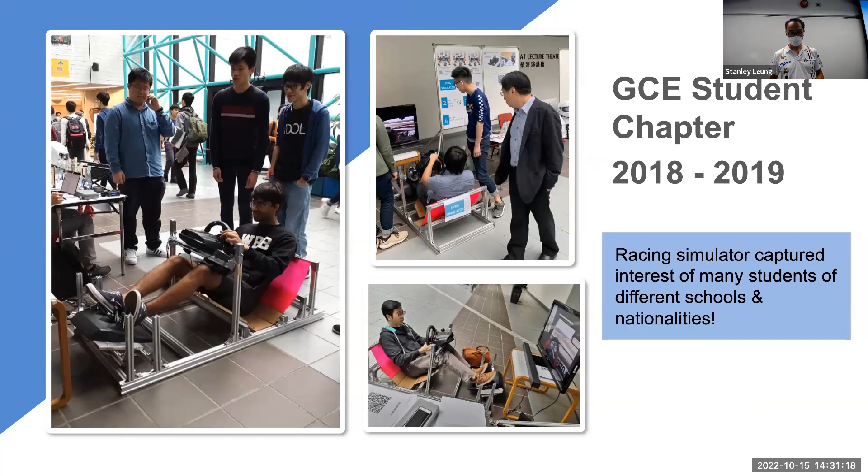Okay, so we also reach out to secondary school students. So why is that? We want to tell them we have this team. We are trying to look for good students in the secondary school to join HKUST and become our team members. Okay. So we also reach out rather than just do the car.

So this is what you say, okay, we developed this car trying to be augmented learning. So learn something real. So we really do the development. We are trying to do peer-to-peer learning. So actually most of the learning is not from me. Most of the learning is from you teaching him, him teaching you. Okay, so you share your experience, share data, share your analysis. This is how the team develops. Because the car is so complicated.

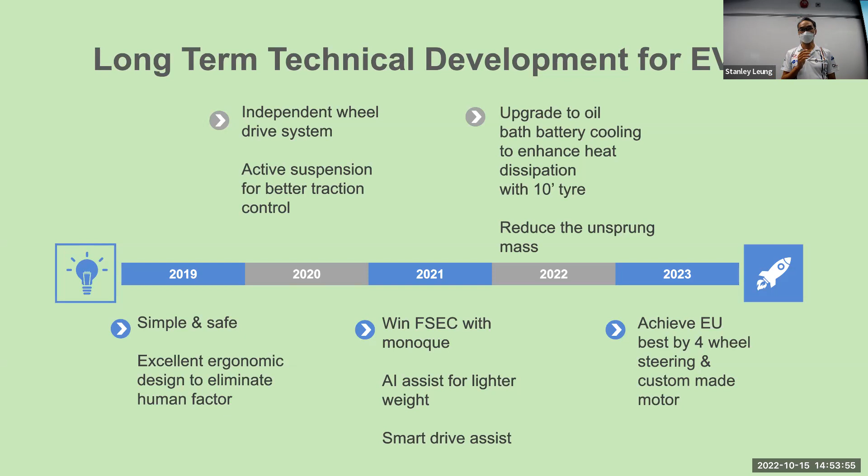Okay, you will say, okay, this 3 years is pandemic, can we get the excuse? The answer is, so it is pandemic, can I ask you to delay your graduation for 3 years? Okay, most students will say no. Okay, that's why you're still here.

So the difficult part is like this. So you may ask, Stanley, you say the thing is so difficult, what kind of technical detail you have done, right? So you say it's so powerful, what is it? So what is your cat? What is your something? Okay, let me show you something.

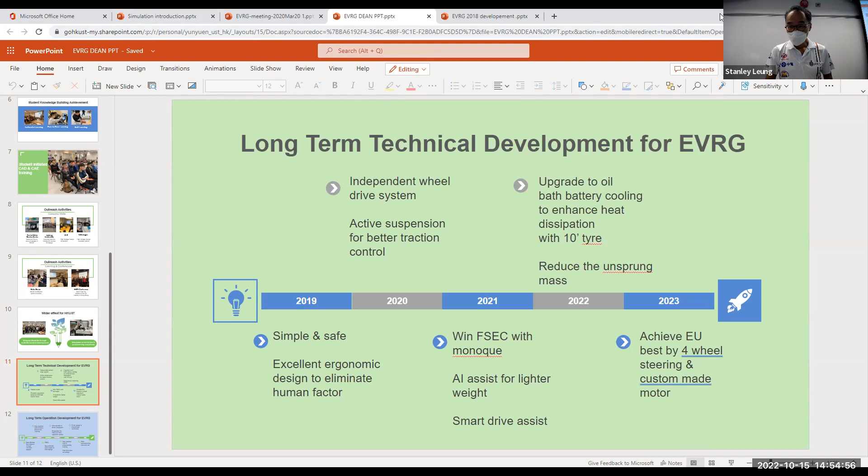Open. Where's my slide? Let me see. One. It's my fault.

By the way, may I know that in the past you guys have joined team or you guys have?

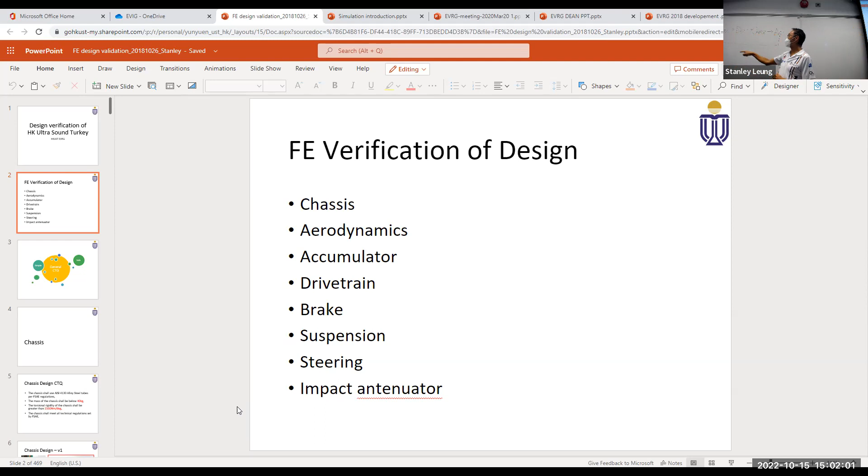Okay, so this is something that we did in the things, based on this PDCA. We always follow this PDCA and we always ask you what is your checkpoint. So if it make, then finish. If it is not make, then we try to change something, fix it, do it again. So very tedious. So we also set a CTQ, Critical to Quality.

So it is like the thing of our car. For example, iPhone 14, our photo is better and better, so they have something. Our thing for our car is simple and safe. This is always true for safe. I don't want you to drive the car and then you get hurt, right? And simple doesn't mean that easy. F equals to MA is powerful, but simple. Simple and safe, this is our CTQ.

Maybe we can discuss about whether we should change our CTQ from this year. But think about it. So we did a lot of chassis, and it turns out, based on my experience, start from chassis, it is not correct.

But at that time, we don't understand. That's why we start from chassis. Why we start from chassis at that time? Because we're thinking about we need some things in the middle so that everything can put it on. But it turns out start from a chassis is not a good idea. I can tell you why later on. Chassis should be later. Chassis should serve us rather than we serve the chassis.

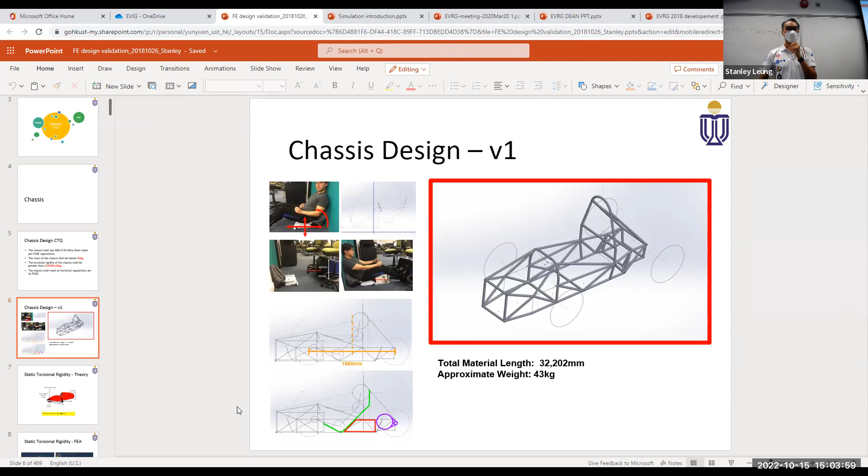Okay, so suspension people understand. So the chassis, first of all, actually, people will think about torsional rigidity. So we did FE on this. For this kind of cage chassis, the high torsional rigidity, it is not difficult.

Why we ask for this? It is because we want to make sure that it is not too soft, and also make sure that we know this number will be fine. So actually, JJ did this thing. In the beginning, he got a very good torsional rigidity design.

Anybody know how much the value he got? You just showed it, I think. You remember in the beginning? So anybody, I mean, you play around with the FSAE for a while, right? What is the value for other teams? Other teams like for space frames at least 1,000, and for monocoques I think that's 5 to 10 times of it. How about the others?

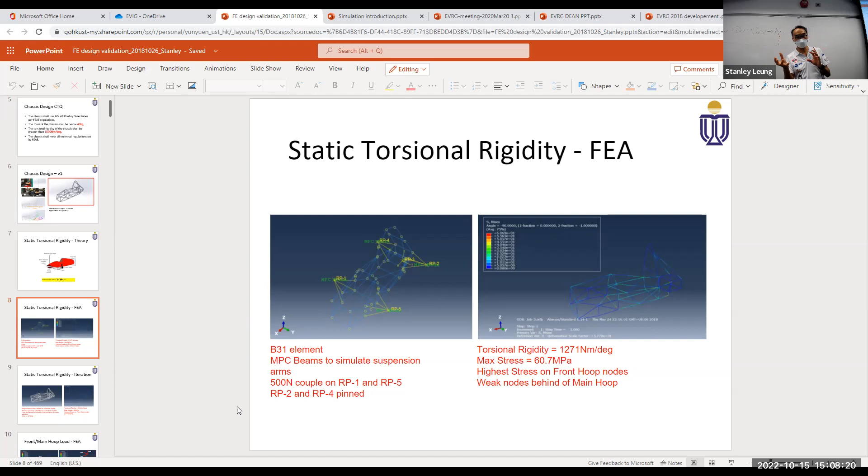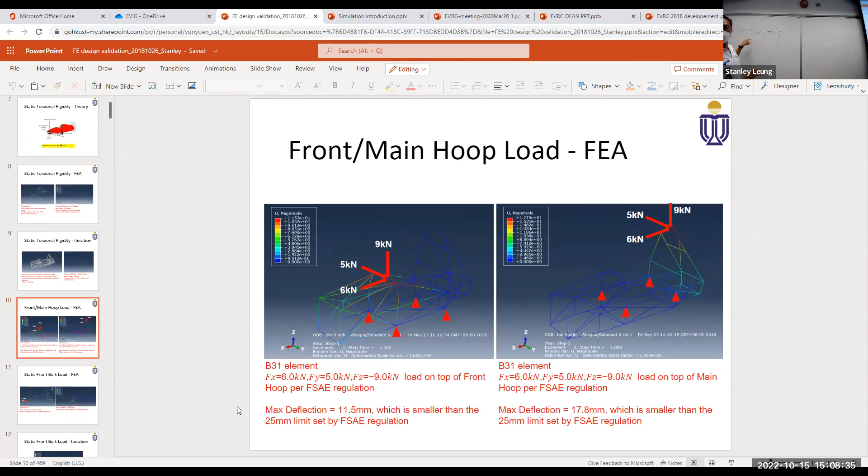So actually, we did reduce the torsional rigidity because we are going to reduce the weight of the cage. So we can reduce some bar so that we lost some torsional rigidity and get it lighter. So a lot of FE for this cycle. So here is the final design, like this.

The final design has one problem here. So this is drive wheel, this bar. We make it too low. Oh, okay. And that's why we always have bad ergonomics. That's why.

So you can be a little bit higher, that's it. Yeah, won't change that much for torsional rigidity, but help a lot for the tension and ergonomics. So this is my only comment at the end. Because at that time, because this bar is so low, we have to choose a small steering wheel. If the wheel is large, then it is over the bar, finish. You can't disqualify, you need to use a small wheel. Small wheel, difficult to turn. That's why every driver says the steering wheel is so heavy, because we need to use the small one so that you don't have a cut off here.

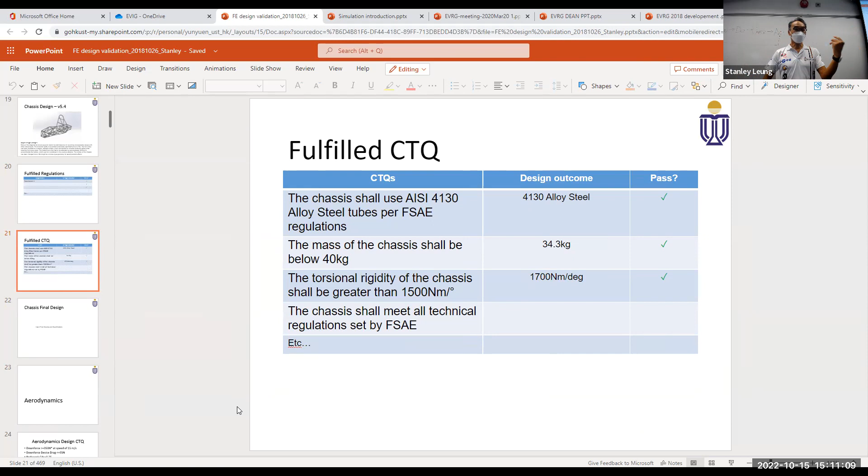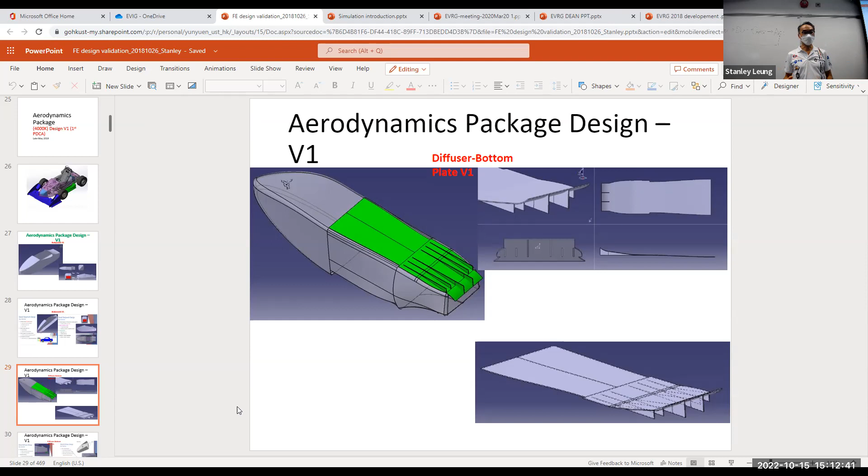So you make the aero kit, there are two goals. One goal is get the downforce. Another goal is try to put stickers so that you get more sponsors. This is very important, right? Your car looks cool, more people want to sponsor you. So aerodynamic kit is important in the sense of sponsorship, more than the downforce, in my point of view, at least at this moment.

So a lot of things we did CFD. We set up a lot of details on how the CFD was done. We assumed the gap here around 0 to 5 cm. We changed this gap to see - not from 0, from 30, not from 30, from 15 to 50 - to see how the downforce changed. Because simulation cannot simulate the sponsor, it can only simulate the downforce.

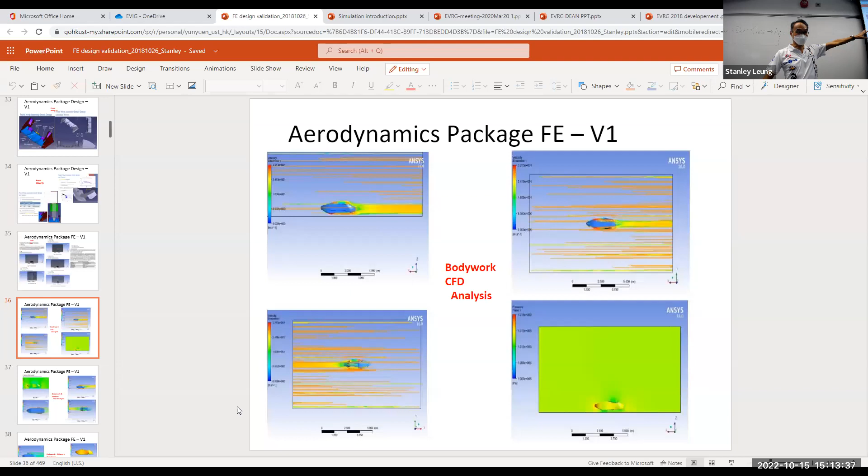Looks cool, and we did verify, asked a lot of questions. I think his simulation is believable. So these are the downforce and drag force results.

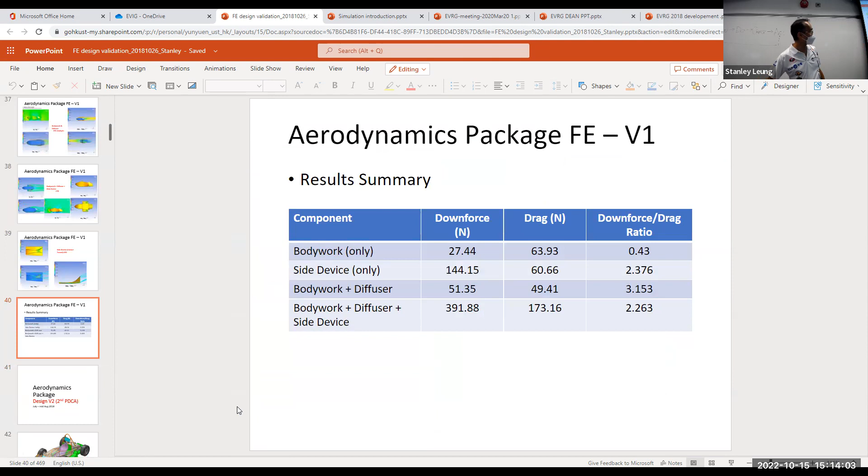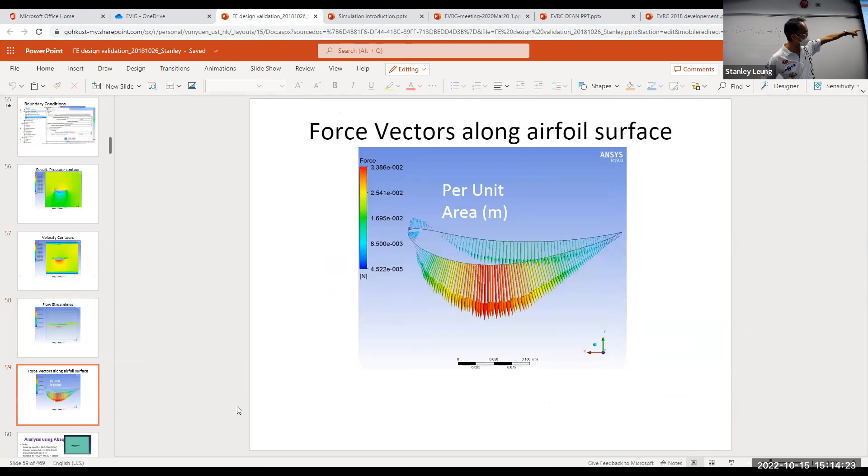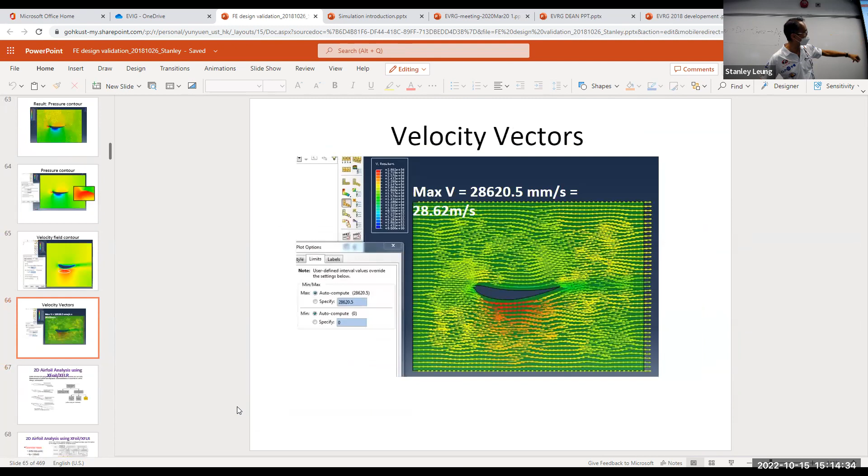Based on this second gen, we again changed the diffuser direction, changed the wing shape, changed the mesh, the force distribution so that it can be evaluated. So the velocity field - because this guy is just an aero student, he knows a lot about these things. So we try to set out the coefficient.

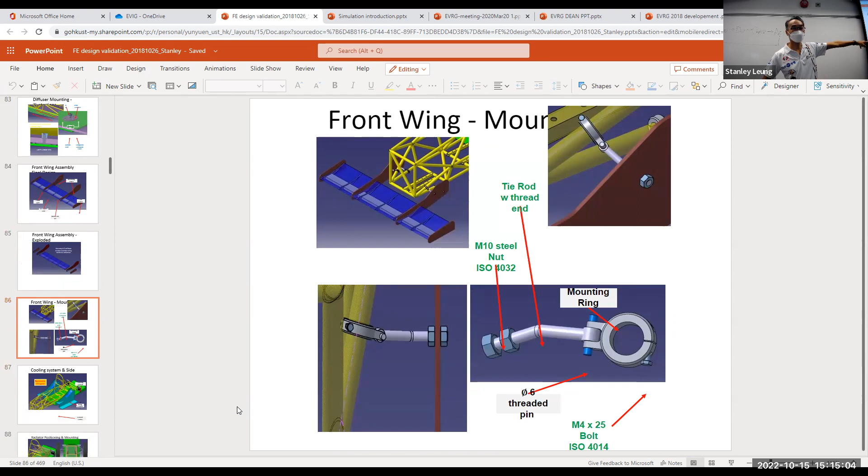Final design - adding how to mount it. The aero kit, the difficult part is we don't know how to mount it.

So for the aero design teammate, if you are not starting from here, you don't need to see me. You overcome this one first. This is the design we have - I still have the CAD. If you have not overcome this one, you just copy.

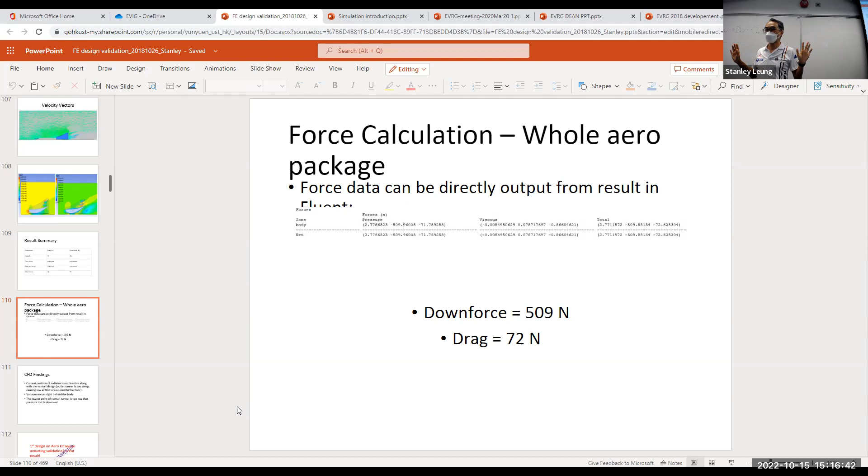We have a good downforce like this, or maybe we just decode those boundaries. So you may ask what the gap is - it is around 30 mm gap. That's why we always care about the gap between the ground and the base plate, because it makes a huge difference. If it goes up to 50 mm, this one is almost nothing. It will drop fast, it will drop fast.

So we fulfilled anything that we tried to get on.

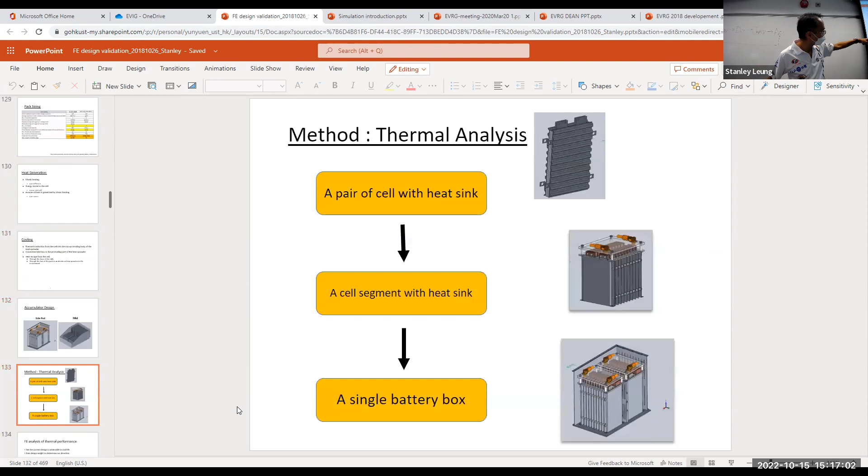So battery - this is why I say, the funny part is that we try to set out the power situation based on the vehicle running on the endurance test and endurance race. And you say we don't have a car, how can we get that? We try to make friends with other teams and try to use their data. One of the Chinese teams was nice to us and shared their power data from doing the endurance run. So this is how we simulate the heat generation.

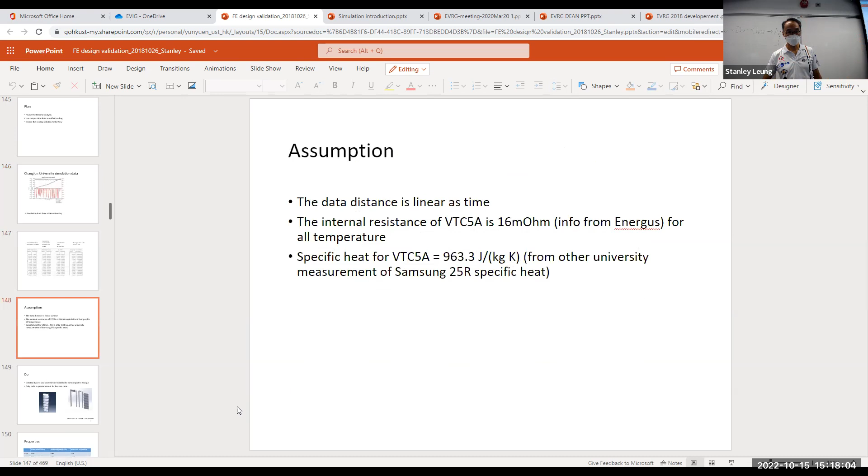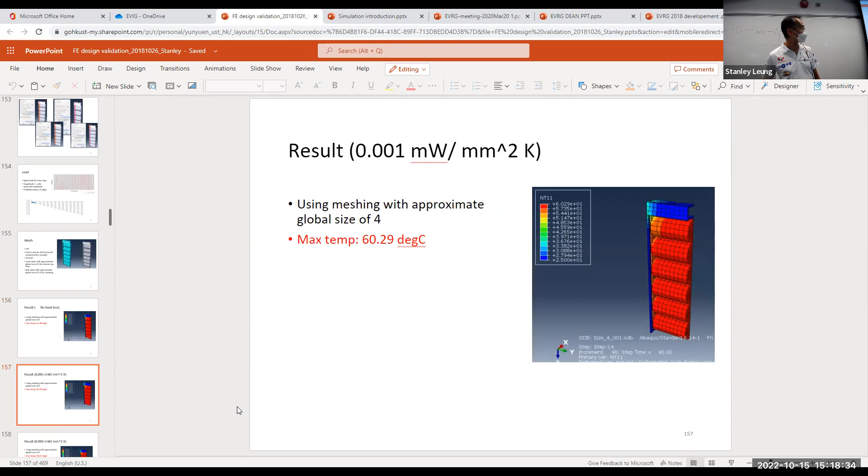So 60-something degrees. That's why at that moment we believed we don't need the heat dissipation on the battery. But it turns out the charge-discharge - so the heat generation is from the charge-discharge, right? So why do we have heat? Because of the internal resistance of the battery. So if your battery is like a resistor, part of the resistor will generate some heat.

And it turns out this is non-linear - we assumed this is linear. The bad thing is that when your battery is discharged a lot, for example, your iPhone discharged more than 50%, the internal resistance gets higher. So that means for your endurance test, you start with your battery cool, and heat generation is actually small. But later on, when your endurance gets near the end, so your battery is almost out, you only have around 30% or 40% of your battery left, actually the heat generation is faster.

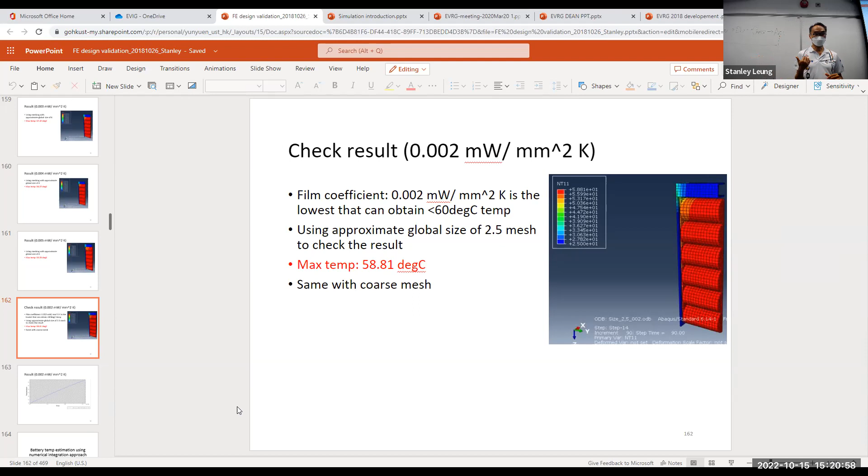So it is very tricky. So at the beginning, you see, okay, how much heat? So the heat generation is like this, and then, okay, it is non-linear. How do we know that? When we went to buy the battery in Malaysia, the supplier that we bought from gave us the charge-discharge data, and then we knew. Okay, and we are glad that we have those data. Otherwise, our battery would be even worse. Okay, so this is something tricky and a surprise from the battery.

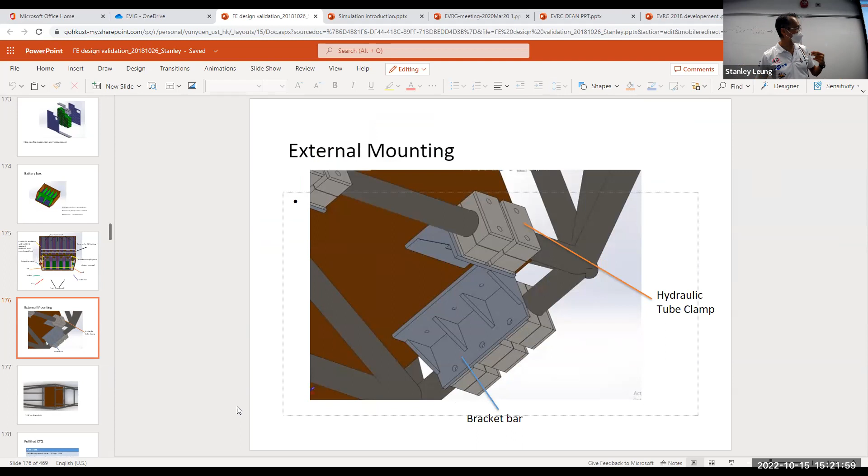Okay, so we still tried to pack it like this. It turns out we wasted our time, but it doesn't matter. How that box is put in the cage of our car, the chassis, the supporting, you need to fulfill the regulation. Okay, the regulation also asks that this battery mounting needs to sustain, I don't remember, 8G of force. It is quite tedious. I don't know whether you have done that design analysis yet or not. That's why we put a lot of anchors at that time.

Okay, so with the battery, not only making the battery, you're also trying to make the arrangement so that it can support the heat dissipation, and also the mounting needs to sustain the regulation requirement. So the requirement is just like, even though the car gets hit with like 8G of force, the accumulator will not be kicked out like this. Okay, so this is one of the requirements of the accumulator for structural, and also for the operation and for the electronic design linked to it.

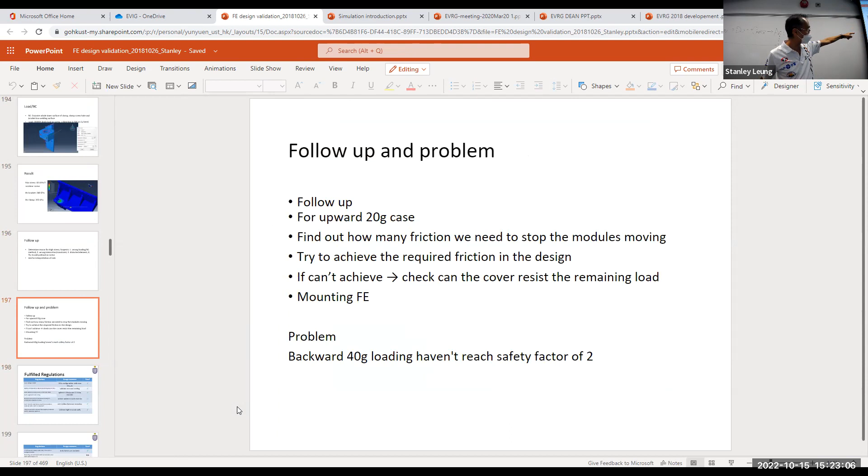Okay, so it comes to the fourth cycle, right? Okay, a lot of things. So we still have a lot of follow-up. But anyway.

Okay, brake system. Brake system, we do the brake system. What is the difficulty of the brake system? Designing the mounting for the brake clamp such that it doesn't fall. It is easy. It turns out it is easy, based on our experience. Okay, the difficult part is also the heat. Because the brake is operated like this. Okay, you have a caliper, and then when you brake, you just clamp it. Okay, this friction will generate heat.

And because you are driving a race car, you try to accelerate, something like this. So you have very strong friction on this. Okay, first of all, your brake pad. Okay, the surface material holding the steel disc, whether it will melt. Okay, if the material itself cannot sustain the upper temperature, then your brake will be unfunctional during the race. Okay, so one thing is just the material selection.

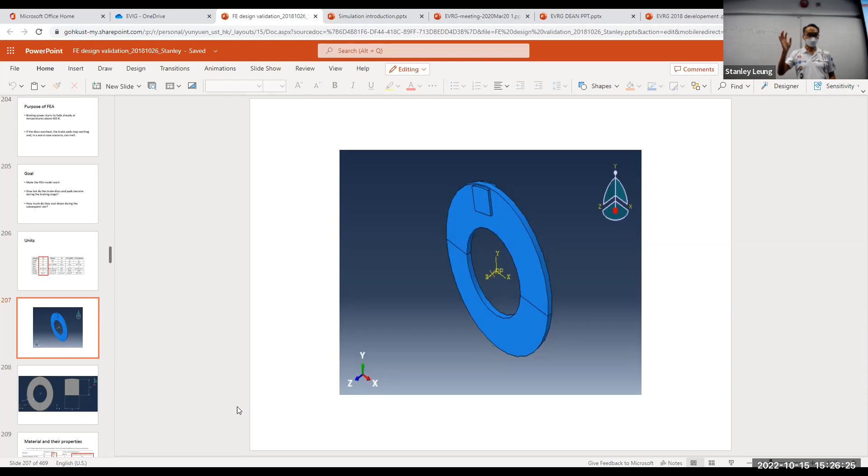For Formula One, the brake pad temperature can go up to almost 1,000. Okay, for our study, our brake pad based on FE can be up to 370-something degrees C. We still can find good brake fluid for this, because some brake fluid is for like 400, 500 that you can buy, but if you go to the Shell station and get a normal brake fluid for this car, bye-bye. Okay, you hurt your driver because he lost his brakes.

Okay, so we are using dynamic simulation for the analysis. So we set up all these things. Okay, so how do these things run? We just simulate the car running for a period of time, and simulate the brake clamping, releasing, clamping, releasing. Okay, so simulate for 1 cycle, 2 cycles of it, and see how the temperature of the brake pad rises. So in this test, we are combining the temperature analysis and also the structural analysis. When you clamp it, you may also deform the structure, whether the caliper can hold or something, all in one for the simulation.

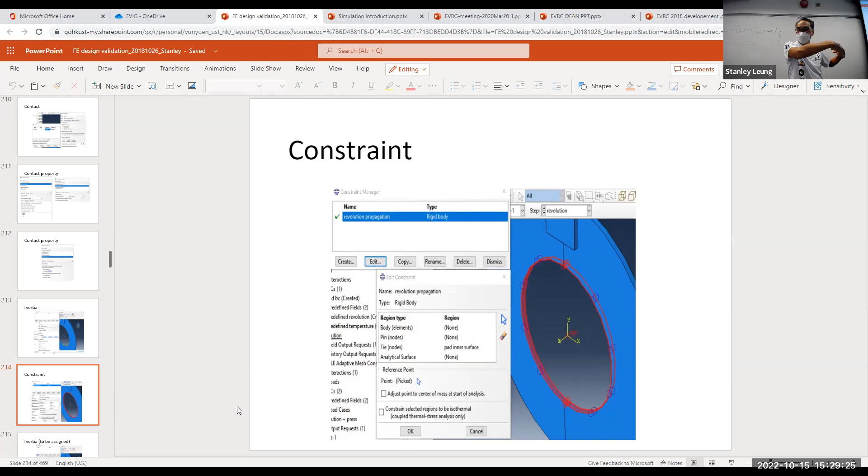Actually, I did this. It turns out when I saw the results, I found that I made some error in my setup. So my 2 weeks of data went away and I started another 2 weeks again. So it is a lot of pain like this.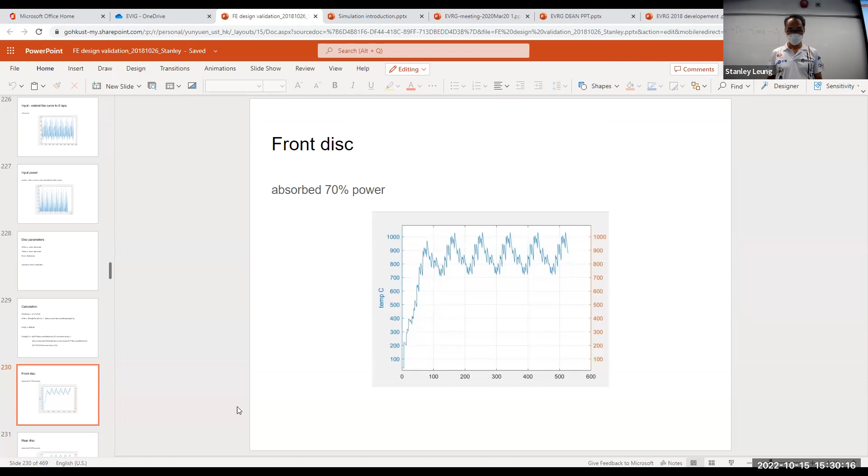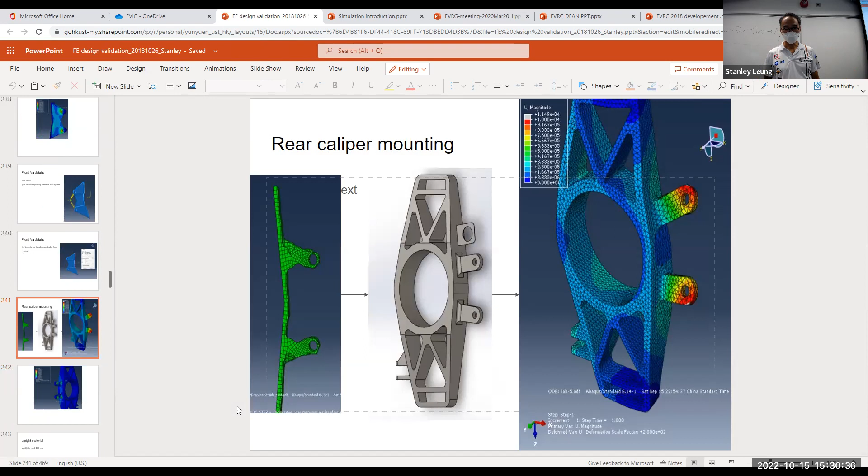Okay, and also just like what Jason said, how can I get the mounting? It turns out in the beginning we tried to do it like this. Not good. Then we fixed it like this. That's okay, so not too difficult. The difficult part turns out to be the brake pedal, because when you push the brakes, you push hard. We made several cycles to fix it.

It turns out, based on our study, you may load it up to more than 300 newtons on the brake pedal. So you only have a bar anchoring here, and your big pad here. So a lot of bending on this, and with bending it is easy to get failure. You mechanical students should know. Bending is easy to get failure, but you cannot change much on the brake pedal.

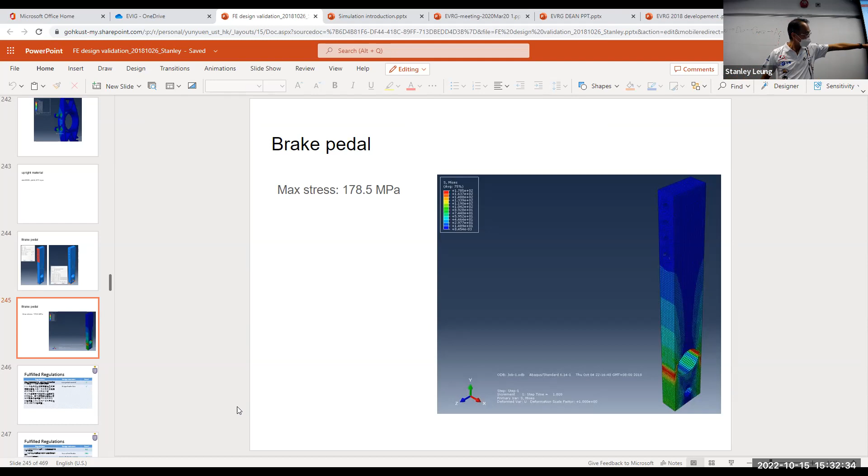And also why you cannot buy a brake pedal from the simulator: because for a game you don't hit the brake pedal that hard, but in a real car you are in some dangerous situation, you are afraid of something, and it turns out that is really dangerous. So the brake pedal is actually the weakest link for brake design. Surprisingly. You think there are a lot of things that are difficult to accomplish. It is not. This one is, okay.

So you also have the drivetrain. So the drivetrain actually is interesting. Why is that? Not because of the drivetrain. It is because of the student doing the drivetrain. It's not a good student. That's what he said. They will say, what the hell is that?

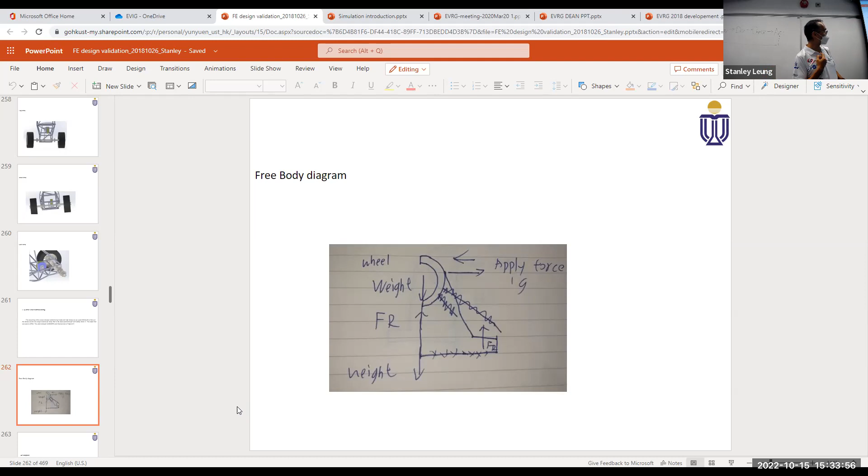So he's a student like this. And his FE, the meshing, a lot of things ugly. Okay, not good. But the foundation is correct because he has the free body diagram. So this is the anchoring, the setup where the loading is; the foundation is correct. Just the accuracy or the details is poor. So this is how he began.

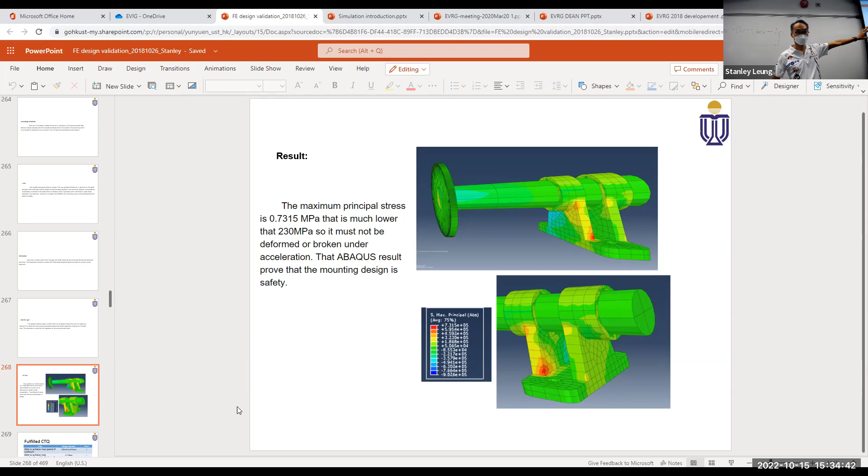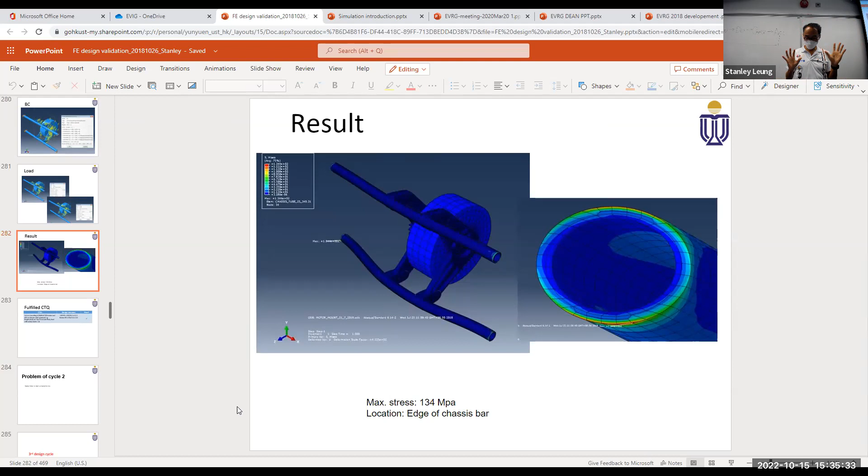So of course, we told him this is ugly, this is not good, and also you need to reduce some weight. That's why we try to reduce some weight here. The details don't matter. He found another thing. The anchor, this thing, is only in the corner, because it's in the cage. So actually all the force goes to the cage, and the cage boundary condition, how to set it, is the art of this result.

So you will see his analysis and drawing getting better and better. Compared to the beginning, this one looks a bit nicer, and you see his setup has more and more details. In the beginning, just some free body diagram and then give me the results. What the hell is that? Can I believe it? So this is the third trial. He improved a lot, giving us a lot of details on where the boundary conditions should be and why.

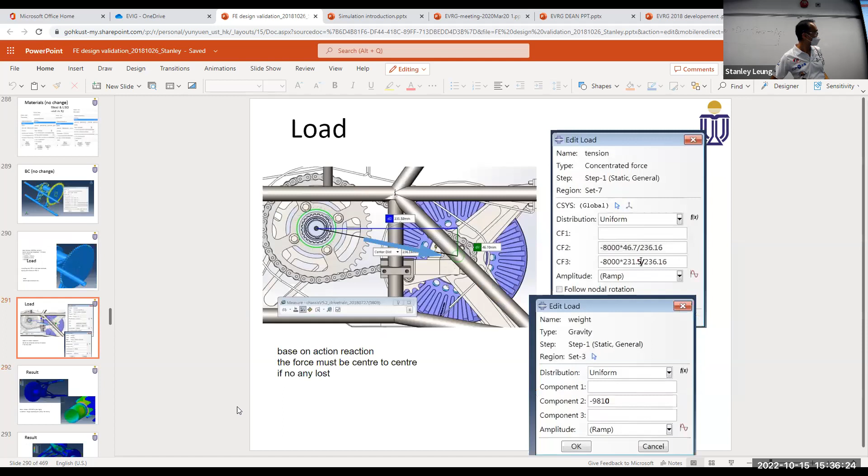So where are the problems? Now we start to identify those problems. The contact, the deformation itself. So this is a rough mesh. He had some doubt whether the stress is okay or not. So he refined his mesh, and it turns out here it breaks.

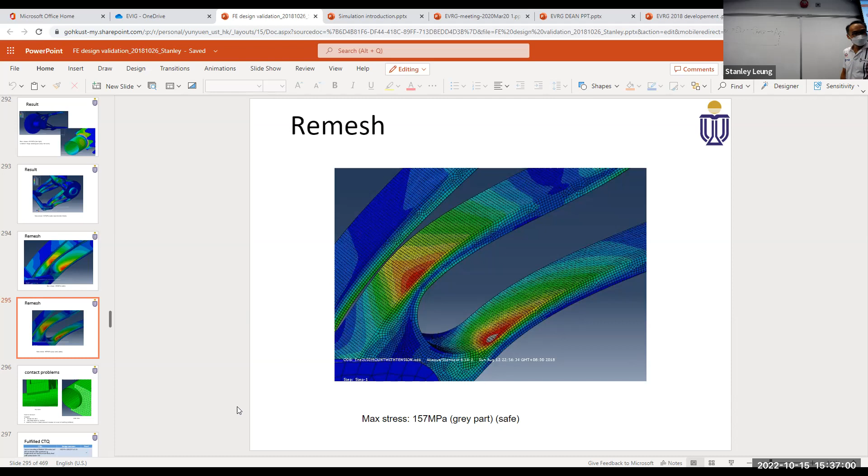Okay, so revise in the final stage. Still a lot of things to fix, but now we are almost here. Okay, we just fix this bar with a stronger, not a stronger bar, with a higher thickness bar, so that we accomplish this stress.

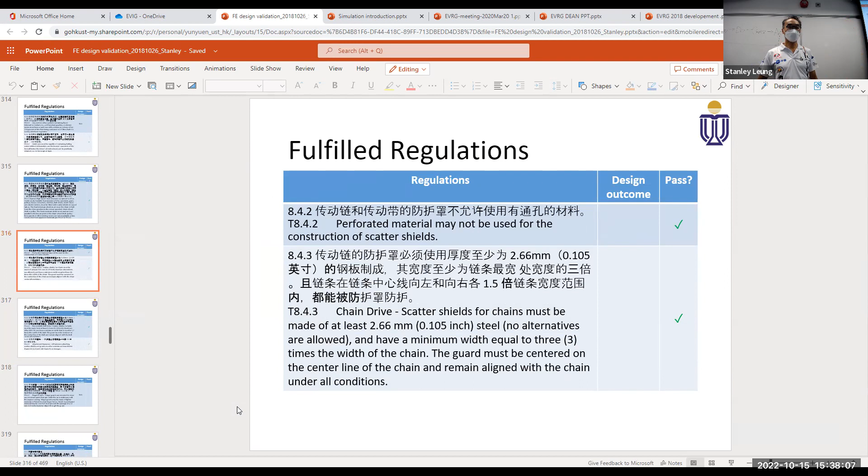Okay, and this is what he has for these 10 months. So you see his results, you see how he improved and learned. I hope you also can accomplish like this. And of course, this is something not finished.

Later on, after this result, we find out one more critical problem. It is the chain. The chain load is very important. And also later on, we work with him to simulate the chain load on these things. So then we accomplish this. So a lot of things. For example, the suspension.

You may be interested. So for the suspension, actually, we didn't start from the kinematics, because at that time we were limited from the chassis and we don't understand the kinematics. So we just copy somebody's and try to revise things. So we start from component to component.

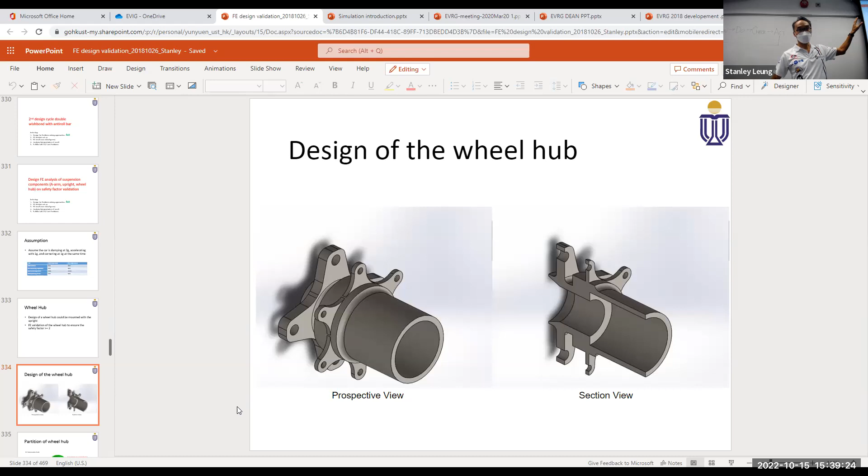For example, we have the wheel hub, do the FE. So wheel hub, is it okay? Coarse mesh, make sure everything can run, and then we do some fine mesh to confirm the stress. So why is it like this? This is the overall, so that we can, in the first tryout, see whether the model can be simulated. It's more like saving time.

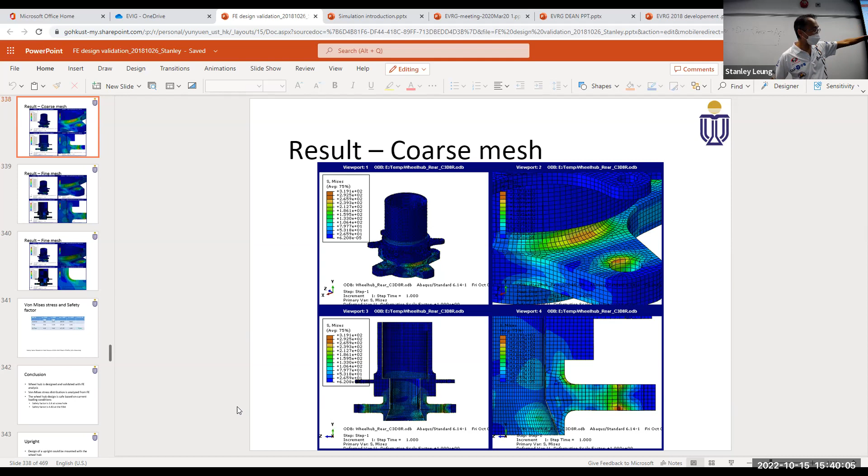Yes, and then we know where are the high stress positions. And at the high stress position, we try to refine the mesh to see the stress intensity. So this is the approach we are trying to have. But you may ask, how can I know the boundary condition? For component level, we cannot. We can just assume.

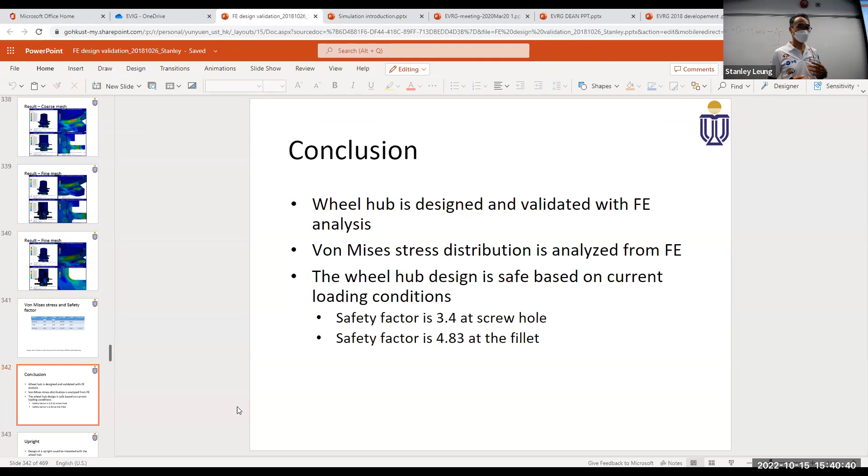So you tell me that I did all this, and then I finished the analysis, then you're bullshit, because your boundary condition, you don't know. You only have your assumed boundary condition. That is not real. You just entertain yourself.

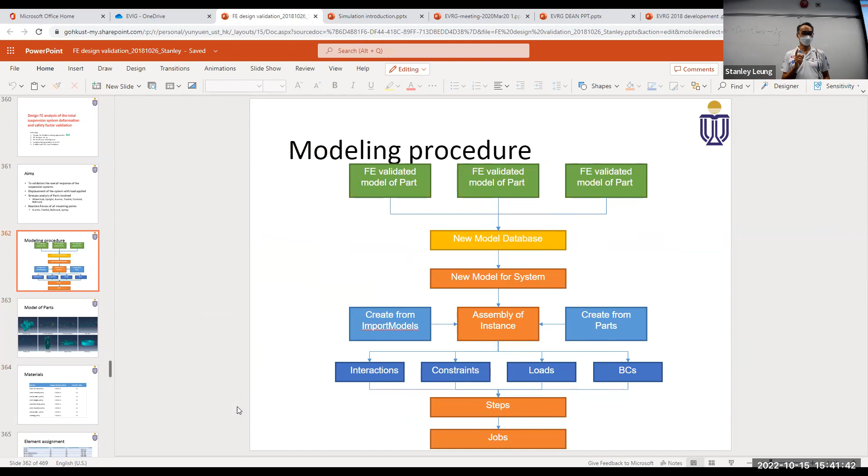So same thing, we do it on the upright, same kind of cycle. A-arm, same kind of cycle. So every component, we did separately. So we know every component we can do the FE. Now we integrate all the components into one FE. Then your boundary condition becomes more realistic, right? So these are the components we're trying to set together.

So all kinds of material properties, what kind of elements we set in the model. So a lot of details, because you need to check whether this component, the element, is compatible. If it is not compatible, then your design actually has some kind of hidden error inside.

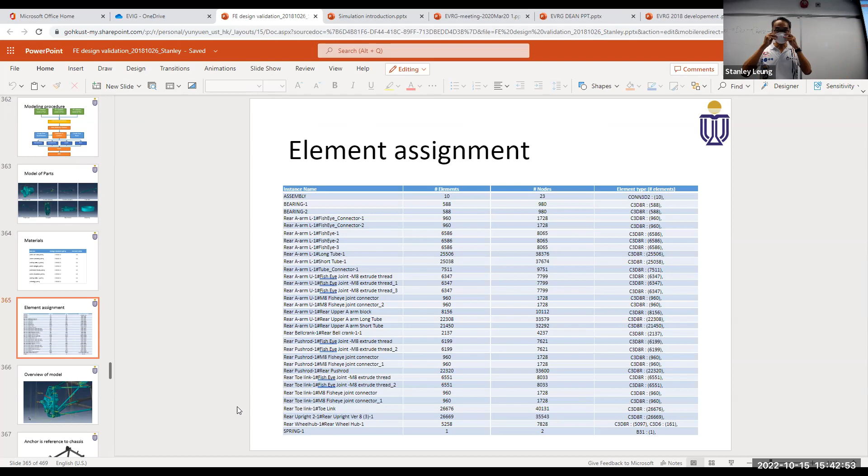What is this element, on the right side? This is the element I have. What does it mean? C3D8R. Oh, you can check it from the menu. So this is Abaqus, right? Yes, but FE people usually know. When you're familiar, this is something really familiar. This is the FE model.

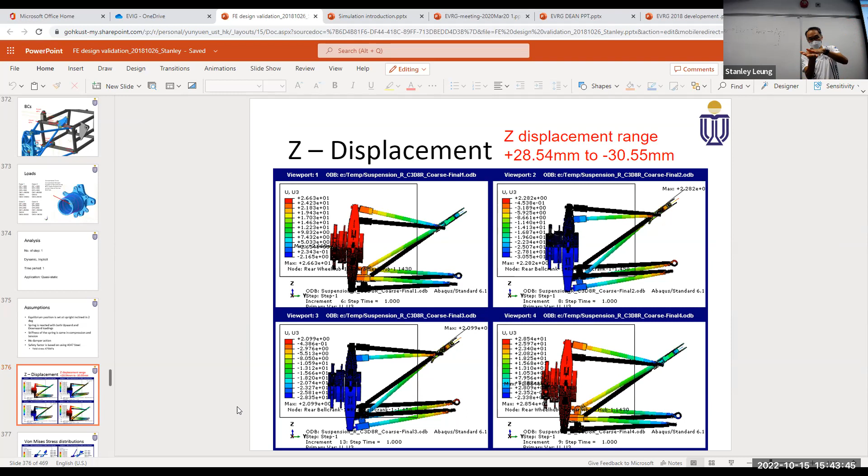So you say, okay, the individual works, the integration should also work. Of course, you need to make some assumptions because in the integration, some things you cannot integrate. These are the results. So what kind of result are we looking for? The displacement, how much it can move, because we care whether our car will touch the ground. So displacement, the stress distribution.

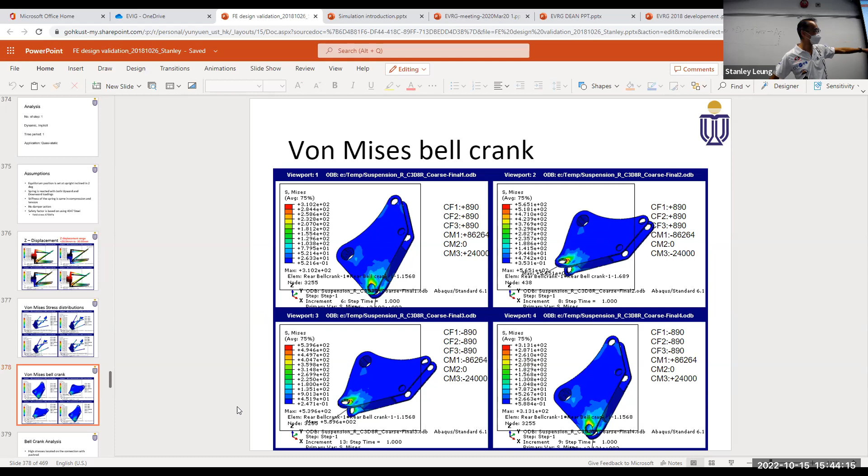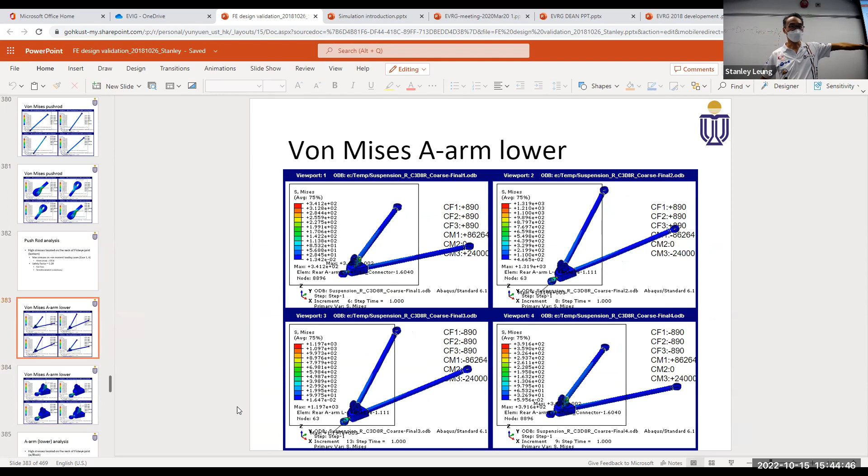It turns out a lot of high stress. Some of the high stress is from the A-arm. Why is that? We have some interference. So push rod, and here, the fisheye joint, the joining corner. Why is that? So this one also fisheye joint. So fisheye joints create a lot of problems and you need to be very careful. So always there, the connection.

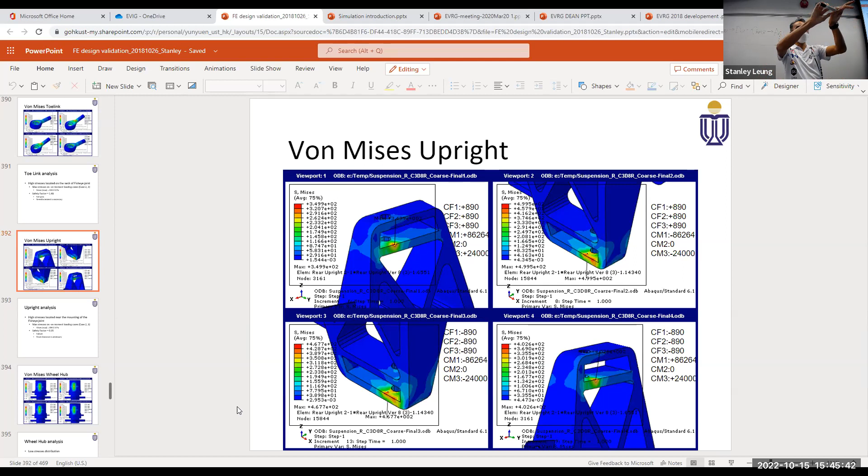So is it more like the rod end actually is bending? So it's actually like this. The fisheye joint is like this, and then this. They are going to break. Yes. So also in the upright, it will be strong. And you see some high stress because the small fisheye joint is taking these things. Then you have high stress. This is a fisheye joint, your upright here, and then it's kicking it, touching. So we're glad that we did the full simulation.

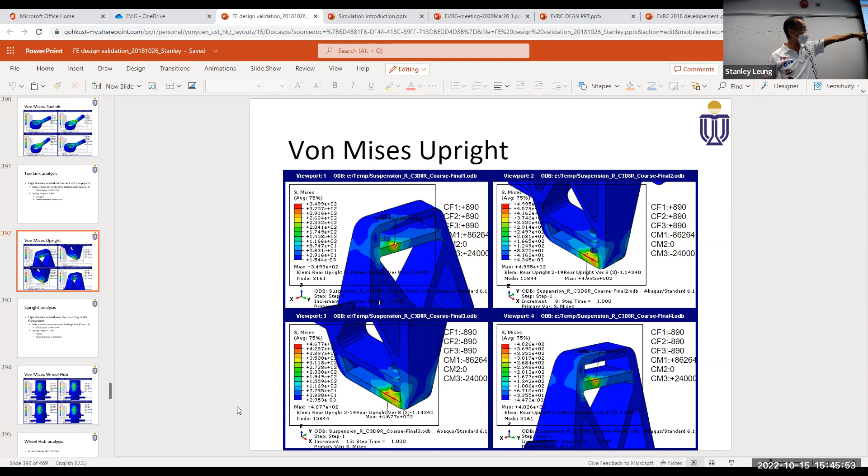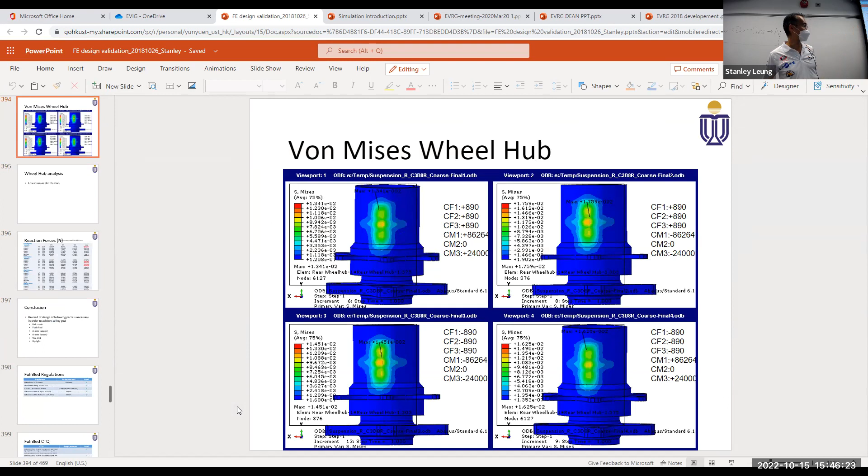So we change everything and do it again. Actually this one was running for 4 or 5 passes to fix the geometry and also fix some load. And ultimately, we also add some spacers. And what's important is that we also output the reaction force of the loading point so that we can check whether the bar will buckle, and also whether the force will be too much for your chassis.

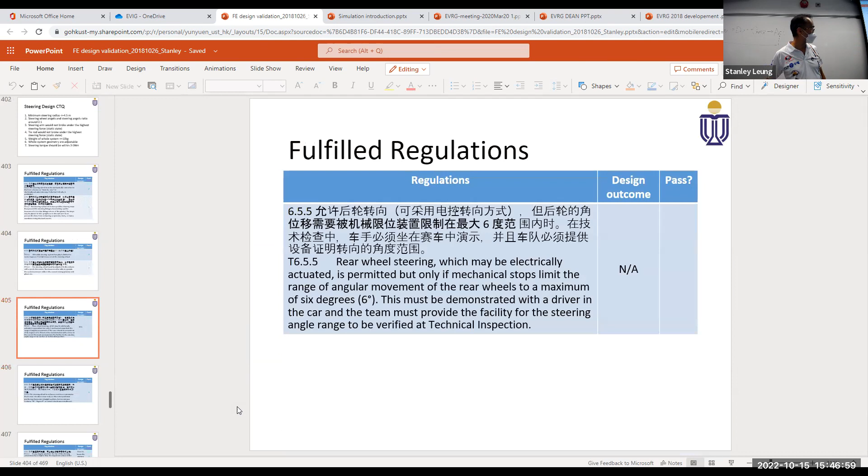Okay, so steering at that time. What is that geometry, the 2D geometry? Oh, the Ackermann, is it? Yes, but it's 2D, because we start from 2D. Okay. So we don't get it from 2D because we fixed the front and the back. At that time, we don't know. So later on, we fixed this thing at the end of the day. Very difficult. It turns out this is the most difficult part.

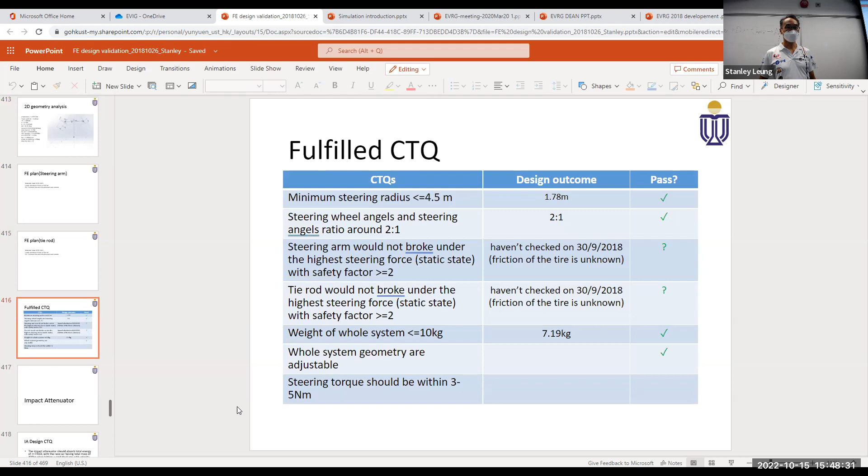So my opinion is that not only the outcome. If you really understand, the kingpin inclination, caster, and your camber, these three things need optimization with the outcome. So only the outcome being okay is not okay yet. That's why you need ADAMS. Otherwise, it's just kinematic steering, instead of dynamically driving the car. But in ADAMS Car, you can do kinematic analysis. Yes. Geometric steering or kinematic steering. So also the IA, but not like this kind of IA.

So how to get this? This way. So the IA itself, I model like this with some material behavior like this. Because this material, you are going to crush it, so you are not going to have a single Young's modulus. Here is your Young's modulus, and when it breaks, it will go like this, and then when you compress to some kind of level, you rise again. So it's a complex governing equation for the IA.

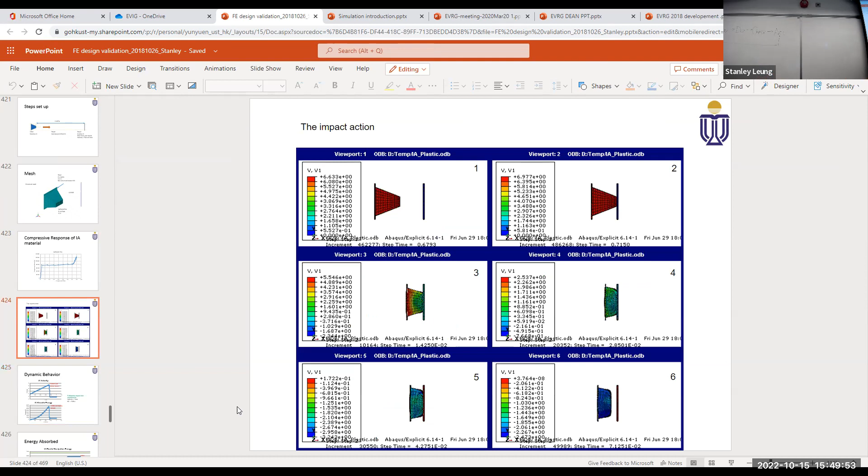Okay, so we do dynamic simulation. The process is like this. What we need to fulfill is KE. So we need to provide the heating in the simulation. We need to have a velocity that is enough to create a kinetic energy of 7,350, because by regulation, we need to dissipate that much energy. If you are not going to provide enough energy, then you cannot dissipate that much. And we need to start from 7 meters per second, the velocity before you hit it.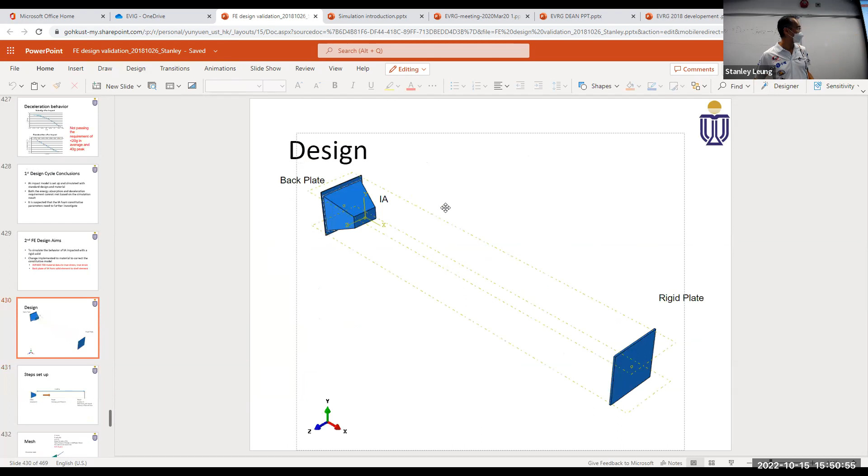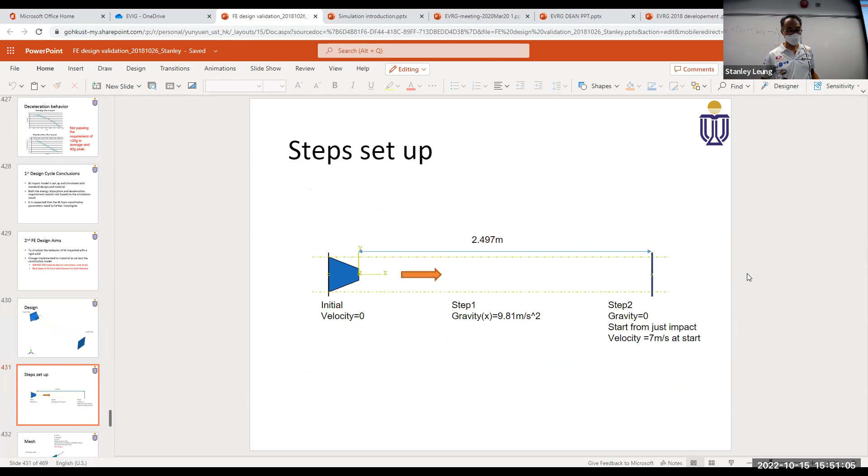So my first pass cannot. So this is my goal. When I hit it, my energy to here, no. So velocity after impact, deceleration. So several things, change the configuration, whether this is not movable. The step like this again. Try to modify the material, because I was suspicious whether I used true strain or engineering strain. So I try both. Simulation, okay. The behavior changed a little bit. See whether I can.

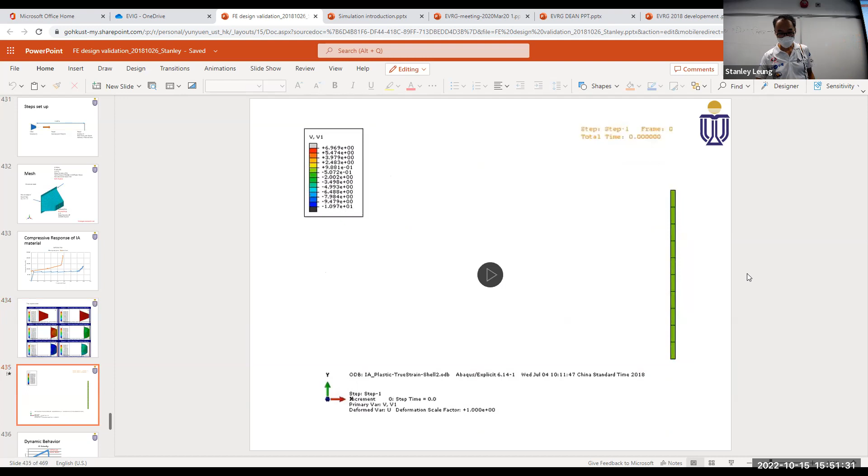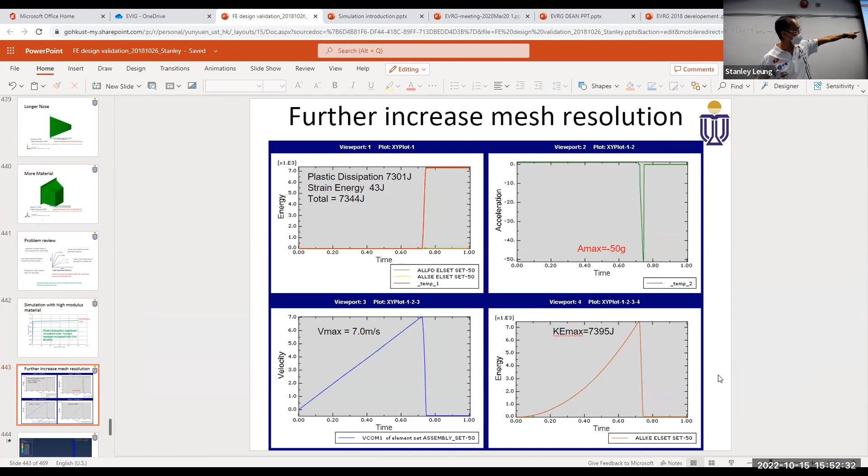This is what you can get from the results of the FEM. So it hits and then bounces back. Hit and bounce back. So again, better a little bit. Still not make it. Make different nose, more material. A lot of problems that I'm going to review, because I know repeated trying is not good. Try to understand whether my simulation has problems and also what kind of sensitivity we can have for the geometry. So added more strain on this, and this is the third time. Like this.

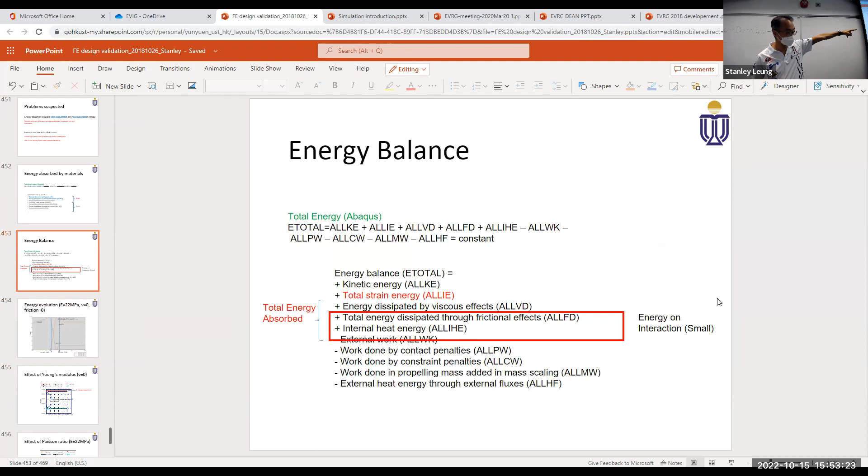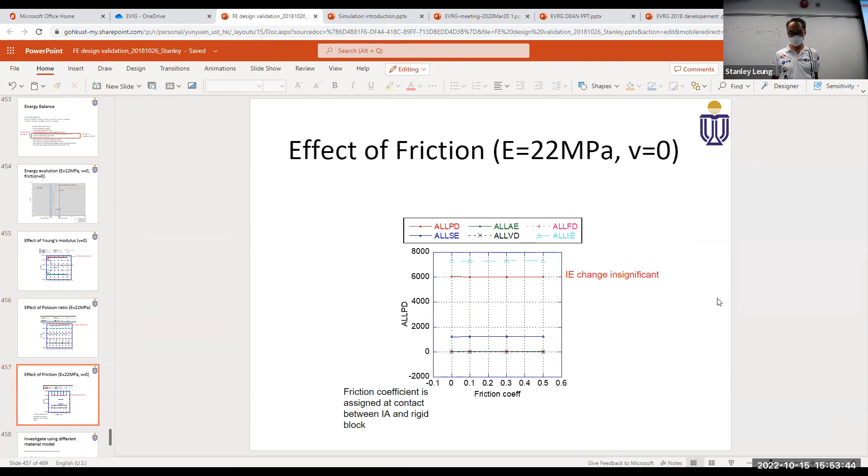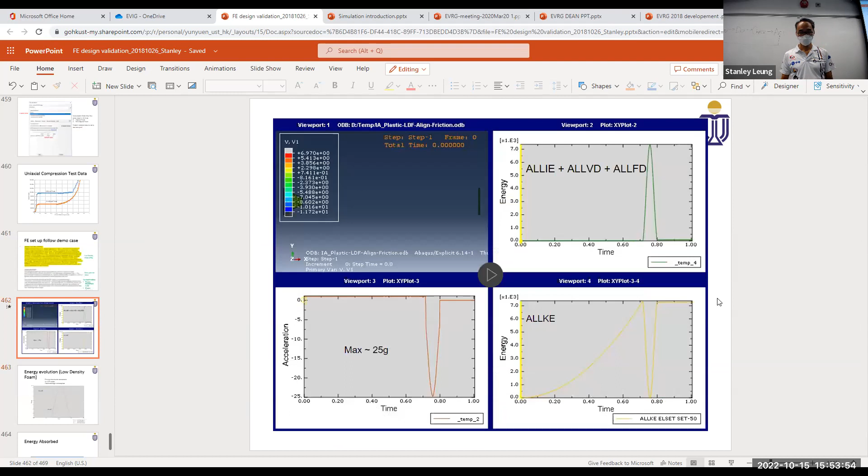So ultimately, I review the energy balance. Actually, in finite element analysis, the iteration is based on the strain energy. What is it related to the total energy? So I try to lay out all the energy, which is related or not related. Try to see which one is important, the internal energy, which is the strong effect and weak effect related to all the components. So using this foam, based on the literature I found for this material, this time I add the alignment on the material and also some friction.

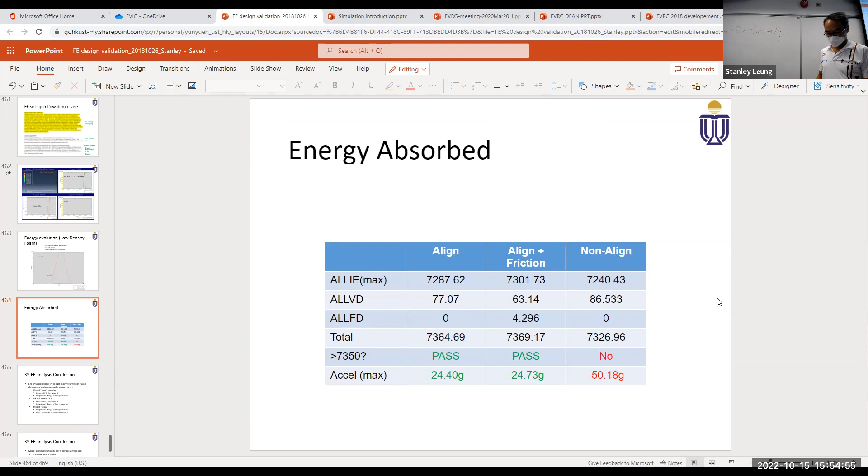Say, what the hell is that? So when your IA hits this, you have some friction. So you see, no friction versus with friction, there is some difference. A little bit. Yes. So even with no friction, it barely passed. With the friction, you pass more. If you are not aligning your material, you're not going to pass. And the important thing is that, oops, whether I can take it.

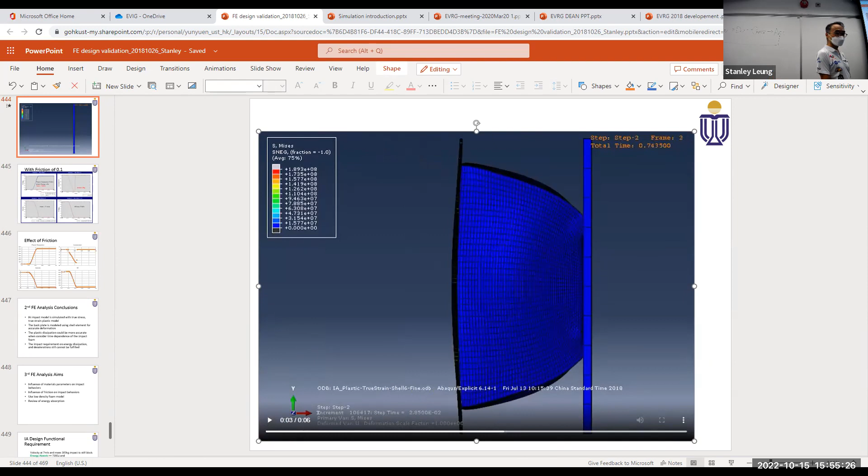So, based on this figure, I don't know whether you realize the back plate deforms. So the deformation of the back plate means it is some kind of strain energy. So I saw your chassis in the front has a crossbar. If you put the crossbar, this thing cannot deform, you fail. This is why. So you squeeze there a little bit. There's the rule: if you get the front bulkhead too large, or smaller than required, if you fail this, you also don't pass.

Okay, this is no question asked. You say I don't put a bar, I fail, but you don't get a bar. You get a bar and you don't get this, you fail also. Okay. Headache, right? You still want to stay here?

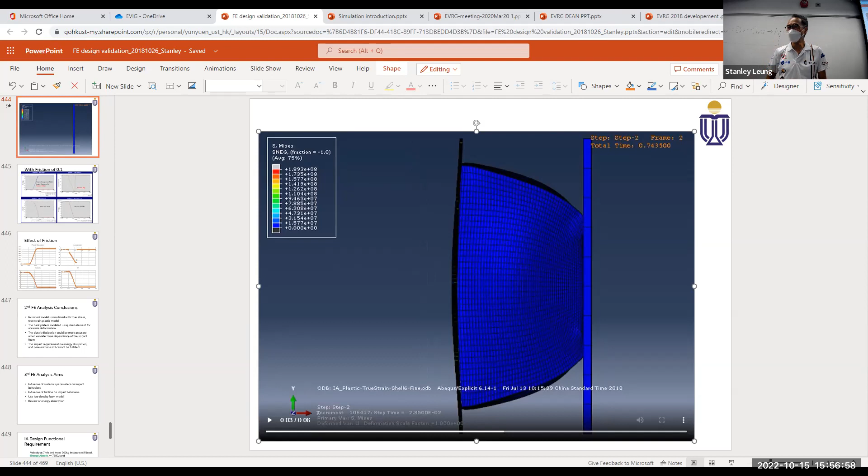Okay. So these are all the things that we did in the first 10 months. In the first 10 months, actually, the whole presentation, we did more cycles on this. So from the beginning of 2018, the analysis up to almost May of 2019. Okay, so at that time, we almost all validated. For those we cannot validate, we cannot validate. Anyway, okay, so this is what we have.

I believe you may start from here, rather than you try to be on a blank paper, because you already have a lot of things. So you improve from here, rather than you spend 1.5 years doing it and it turns out it is not up to here, then we waste our time.

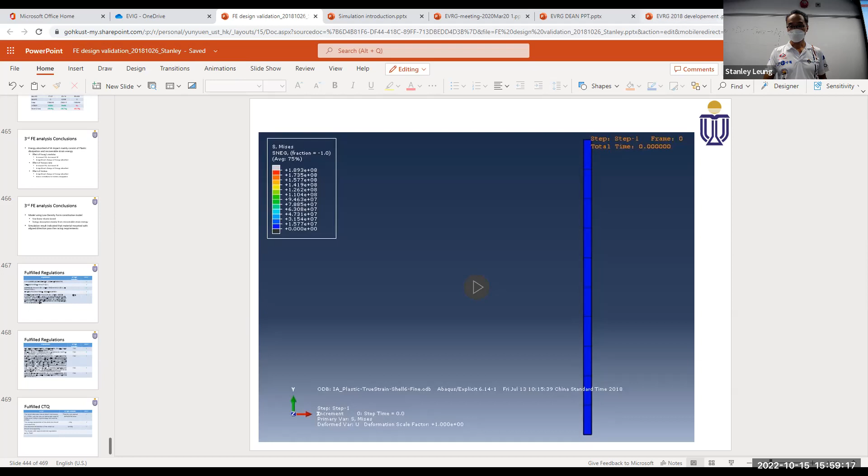Okay, so the other knowledge is what I think you need to start. It is like some basic learning. Okay, for example, learn some design. Okay, so I will try to go over.

He should turn off the mic or. Hello. Okay.

So before I end today, we also need to make some sense. I think for us, the design people, we need to make some sense. For example, let me go back to basics. So when you design your car, how can you start?

Orientation, know the aspect. Know where to put the wheels and where the weight lays. But now you only have a blank picture. Then you decide which direction, where the weight lays. So what I do is just sketch something, right? Sketch something.